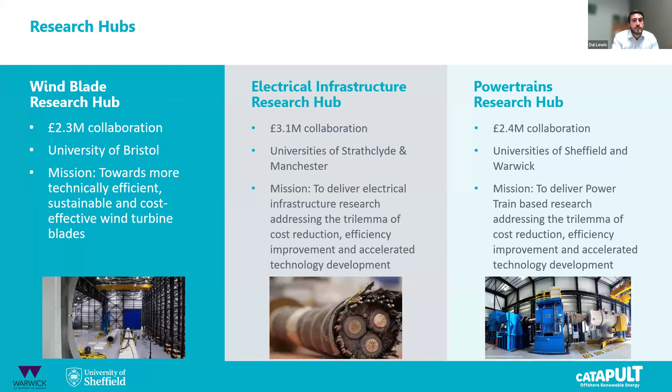There are a number of motivations for us in developing the Powertrains Research Hub, all based around improving reliability and affordability of wind turbine powertrains as they get larger and larger in order to meet our 2050 net zero targets. We've worked with a range of stakeholders and aim to disseminate the research to as broad an audience as possible throughout industry and academia.

Since its inception, we've developed a strong collaboration with the Universities of Sheffield, Warwick, Strathclyde, Northumbria, and have also undertaken a number of research projects with GE through the programme. We've undertaken a large number of co-funded PhDs and research projects and have disseminated the work at many international conferences and within a number of journals.

I will now hand over to Hyunjoo Lee, our head of turbine systems, who's going to speak to you about how the work has supported us.

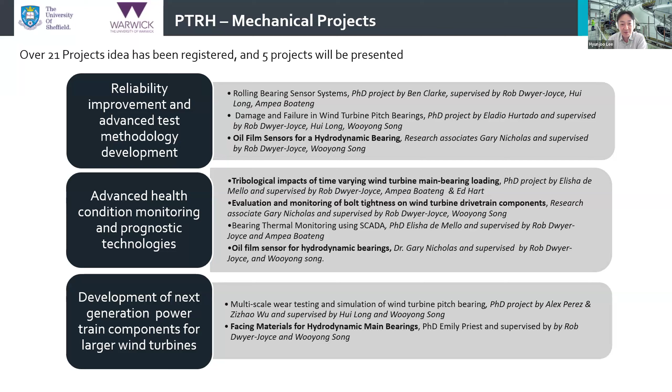Dr. Gary Nicholas investigated 2 interesting topics: the first is the evaluation and monitoring of bolt tightness on wind turbine drivetrain components, and the other is the oil film sensor for hydrodynamic bearings. PhD student Ms. Emily Priest will present her ongoing research about the facing material for hydrodynamic main bearings.

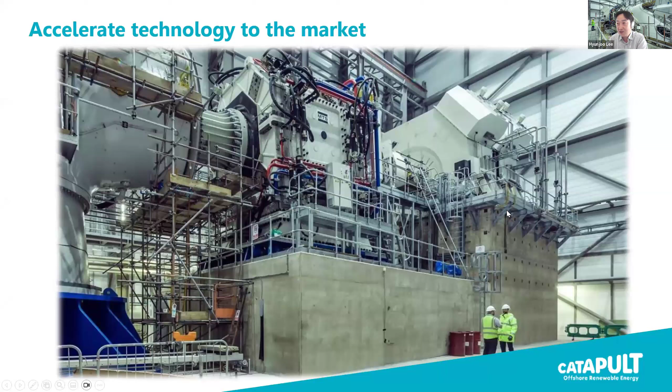Thank you once again for your attention, and let's work together to bring technology to the market faster. I'll hand it over to Professor Rob Dwyer-Joyce.

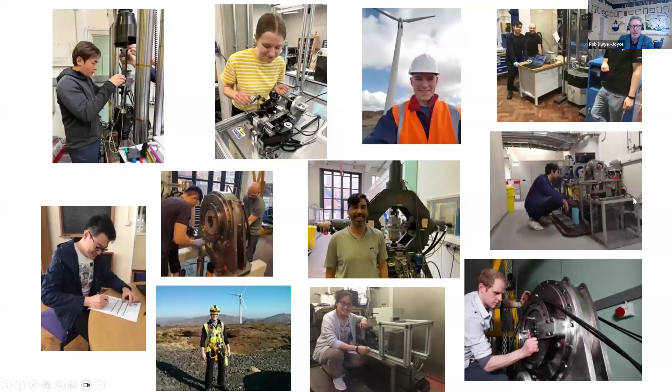The PTRH, when it boils down to it, is a group of PhD students and researchers who have had the opportunity through the PTRH, working with our partners OREC, to do some really exciting projects in the wind domain. There's some pictures of our PhD students at work. You'll hear from a couple of those today.

Actually, other PhD students around the patch at Sheffield are rather jealous of these guys, because how many PhD students get to go up a wind turbine during their projects? Two of ours have, and they're all working on really live industrial projects.

So I'm going to finish with that picture of some very happy, contented PhD students, some of whom have got their doctorates, and some of them will get them soon.

Okay, thanks. Now I'll hand over to my colleague, Professor Hui Long, and she'll give the first technical talk from the projects that have come out of the PTRH.

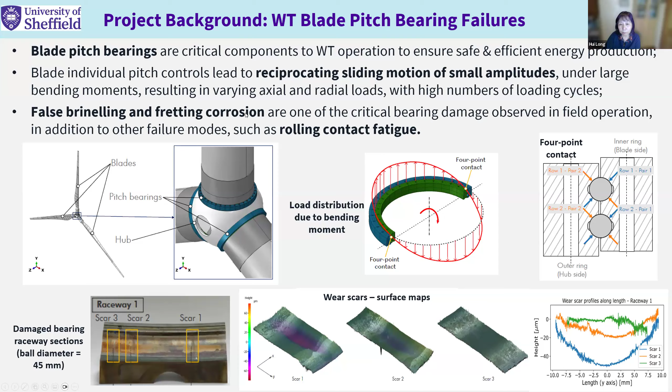In this research hub framework, we have two projects in this area: M7A and M7B. I'm going to talk to you briefly about those two projects.

The objective of this project is to develop an enhanced test strategy for large scale tests by developing a small scale laboratory scale test method, because large scale, full scale testing is very expensive. We want to understand the frictional behavior and wear damage accumulation using smaller scales before we conduct large scale testing. We also develop finite element simulation models to model wear accumulation in those tests.

Those findings will help us develop a better understanding for future tests. The work I'm presenting today has been done by researchers Eladio, Alex, and Zizhao.

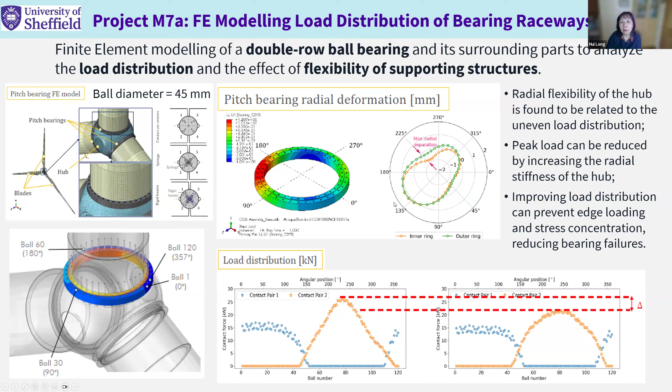With that understanding, we moved on to develop the experiments. M7B looks at those experiments. We have two small scale and medium scale experiments, developed and performed at the University of Sheffield. These will support future large scale experiments, which will be done at the Catapult in the future.

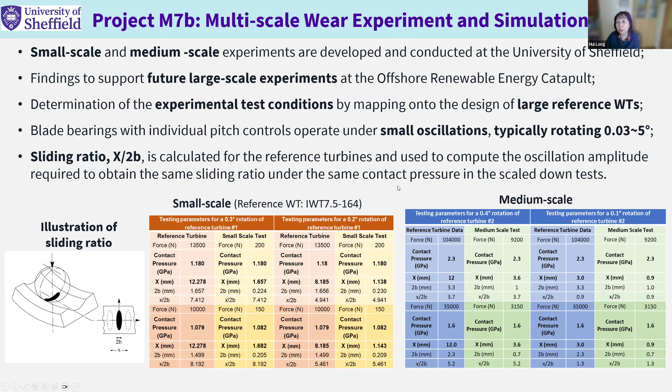The first thing we need to do is develop experiment test conditions by mapping onto the design of a large reference wind turbine. Two important parameters we need to decide are contact pressure and sliding ratio. There are some illustrations here showing what we try to map with the large ones, so we make sure what we test in the small scale and medium scale can map the similar operation conditions of the large wind turbine.

This is the small scale experiment design, testing, and finite element modeling. The tests are performed on a small test machine, the UMT3, and the specimens are cut from a commercially available wind turbine ball bearing. This way we can achieve the parameters we need, since this is the cheapest way we can manufacture specimens. This table shows all the tests conducted and some examples of measurements and comparison between FEA and measured wear depths.

The measured average frictional coefficient is quite low. We use Alicona to measure the wear depths. However, due to the limitations of this small rig, we are not able to capture the effect of higher oscillation amplitude and higher contact pressure, as contact pressure and amplitude are relatively small. However, this method is very efficient to get wear rate, which is shown here and is an essential parameter for finite element modeling.

We move on to look at the medium scale experiment design of test. This rig is a biaxial rig in our mechanical lab. Using this lab we can look at a bore diameter of 25 millimeters. We developed this test plan, and as you can see, we achieved the ability to determine average friction coefficient using the force measured by the rig.

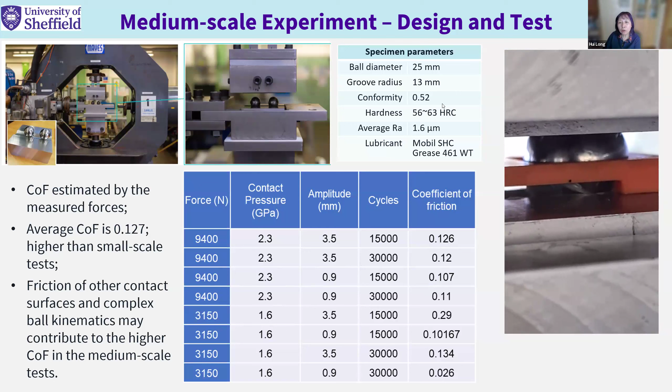The friction coefficient is higher than in the small scale test. We believe this is because this rig design involves other contact surfaces and more complex ball movement, as you can see the ball shows more complex movement, which may contribute to the higher coefficient of friction. We use a grease lubricant, commercially available, the only one we found for wind turbine applications.

Some measurements are shown here. We measured some of the specimens and then decided we can determine the wear rate from the test. This wear rate, as I mentioned, is essential for finite element modeling, and is higher than in the small test. Again, one reason is the more complex ball movement, and also because the initial surface roughness of the specimens in those medium scale tests is higher than in the small tests. These measurements show some of the characteristics we saw from measurements of the real pitch bearing sections we studied.

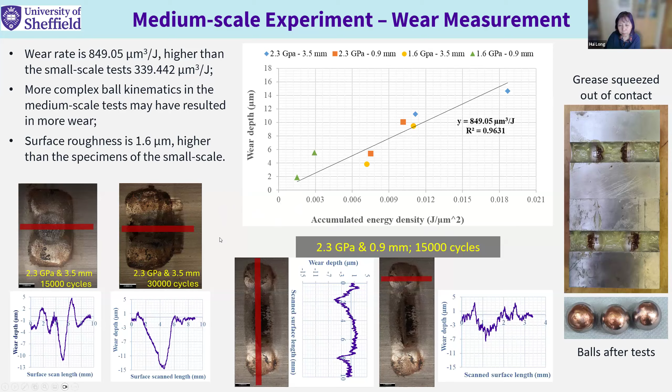Through evaluation of the effect of wear rate values, considering 100%, 20%, or 10% of the dissipated energy contributing to wear, we are able to find a close match between FEA and experimental measurement.

Another important observation is the contact stress distribution pattern and also the wear pattern. We see the wear is significant in the top and bottom regions where the contact pressure is not highest. This is because it's the Heathcote slip.

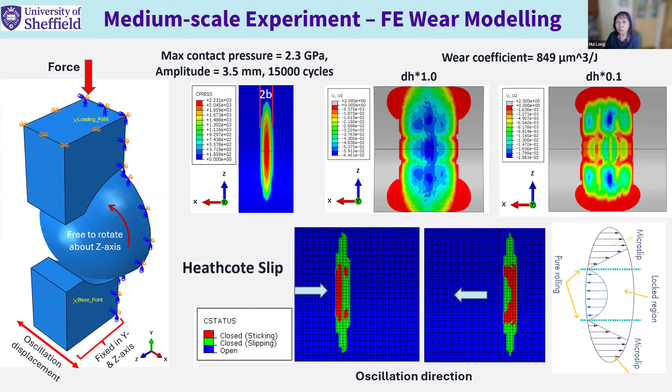This is because in those regions we have pure rolling. So FEA provides good insight into the more complex condition of both effects of contact pressure and sliding.

Currently we are working on the FEA simulation of the large scale test. This is only a very initial, preliminary result for a very small number of cycles, 2000 cycles.

Some main conclusions: the measured wear rate shows a similar linear trend, basically increasing with load cycles. And the medium scale test reveals more complex ball movement than the small scale, which couldn't produce this.

FEA modeling and the test from the medium scale show similar wear patterns, which also confirms contact pressure, oscillation amplitude, and Heathcote slip are important to wear accumulation.

We also show FEA modeling can clearly show the effect of Heathcote slip, and we can use the evaluation of dissipated energy contributions to wear. In our case, 10 to 20% enabled the accurate simulation.

We currently continue the large scale FEA simulation, and we will report our progress to you in the future. Thank you.

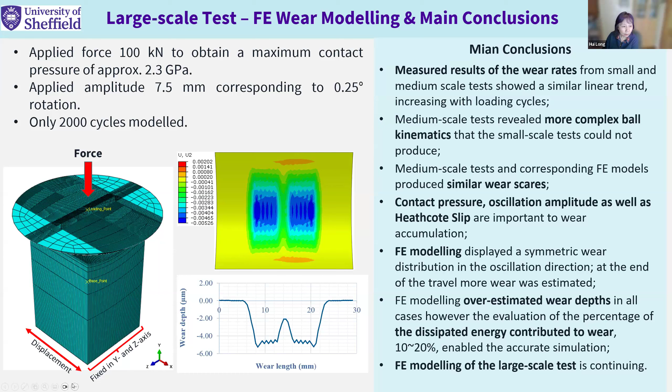And next we have Elisha. Want to share? Of course, two seconds. Is that all visible? Perfect, thank you. Okay fantastic. So yep, I'll just crack on then.

This is my bit of an overview for my project and the work I've done here with Aura for the last few years. I'm looking at the main bearing of a wind turbine. My work is mainly focused on spherical roller bearings, which are quite common main bearings in wind turbines.

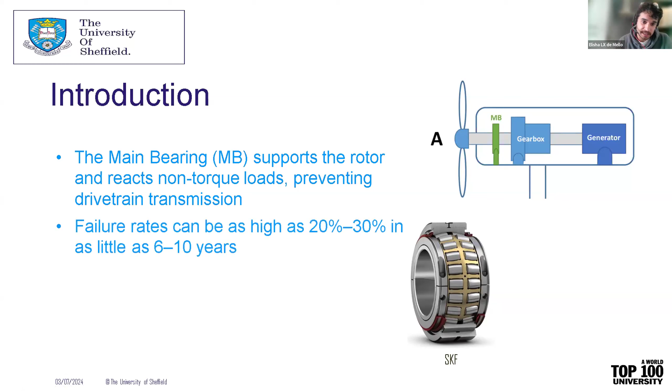The role of a main bearing is to support and react against damaging loads, preventing them from being transmitted further up the drivetrain to critical components like the gearbox and generator. Failure rates are currently very high, which is problematic as replacement of main bearings is typically very expensive, especially offshore, involving additional factors such as vessels and unplanned downtime for extended periods.

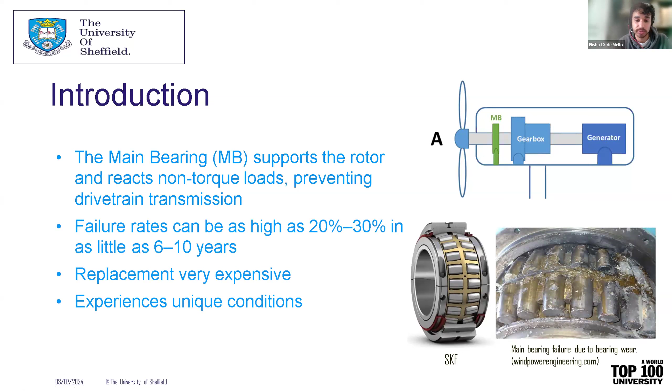To really understand why the main bearing fails so frequently, we need to understand the unique conditions the main bearing experiences. I'm just going to talk about that for a slide.

The unique conditions the main bearing experiences compared to more general bearings include very low speeds, around 20 RPM or so, and exceptionally high loads, thousands of kilonewtons. There are also multiple combined effects due to the nature of the wind and the wind turbine's adaptive control system.

These are just a few of them listed here, but when we consider these as a whole, we find that the loads exhibited on the bearing from the shaft are circularly looping, one to two second duration loads that fluctuate and move around the circumference of the shaft. This is a polar plot here.

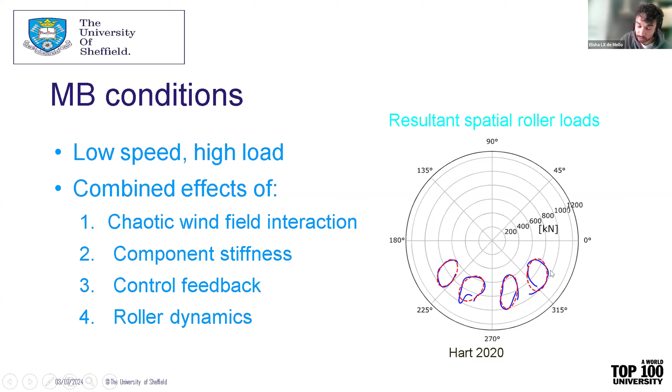Here is an angle, and we're getting these loads that are looping around circumferential locations of the bearing. So they're very complex loading patterns we're seeing.

My project was really to investigate the effect of these loading patterns on the main bearing. So I'm located here, if we're looking along the drivetrain of a wind turbine, and my project is basically split into a theoretical component and an experimental component.

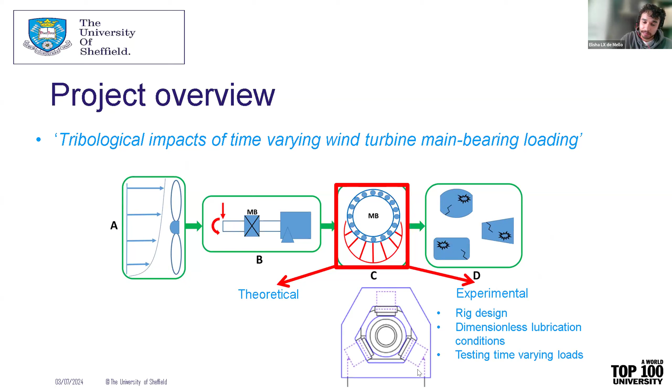Experimentally, the plan is I'm designing and implementing a rig where we can use actuators to load these to create a vector of a load that can span and move around the circumference of the bearing and give you the same looping loads we've just seen.

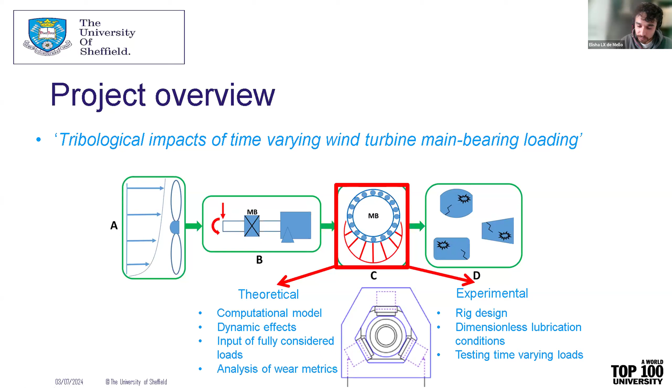Theoretically, I'm using computational techniques to investigate the specific dynamics of the rollers, these individual rollers, as they move around the bearing, and how to input those time-varying loads I just showed you on the previous page.

So just one of the initial bits of work I did was this macro slip model, which took the first year or so.

The idea was this was a Newtonian model, so it considered the forces that each roller experienced, such as reaction forces due to contact, gravity, centrifugal forces, cage reaction forces, and the like. It uses these forces to integrate the velocities of the rollers and treat them as rigid bodies.

The idea is that a contact patch is formed due to deformation of material. When the raceway and the rollers move, if the forces are great enough and friction is not sufficient to drive the system, you get relative differences in the velocities of the raceways and the rollers, creating slip. This slip is believed to be damaging, and we use frictional energy as a damage metric, an integral of slip and the reactive force in parallel to that direction.

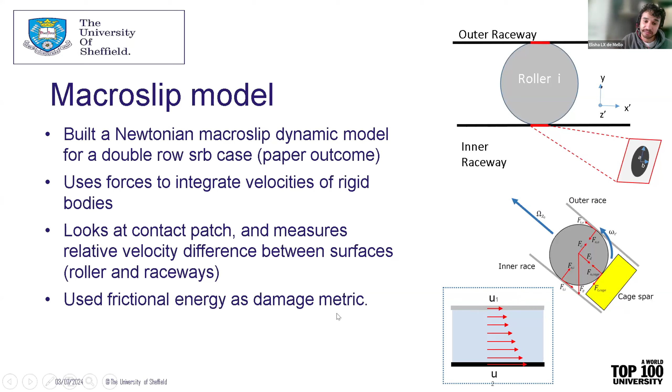So this model directly investigated slip, and we found, looking at these normalized results, that we got higher frictional energies at actually lower wind speeds. This corresponded to the operational thrust strategy of the turbine, as it started to pitch its blades after that, giving a higher radial force and less thrust force. That was an initial result of the study.

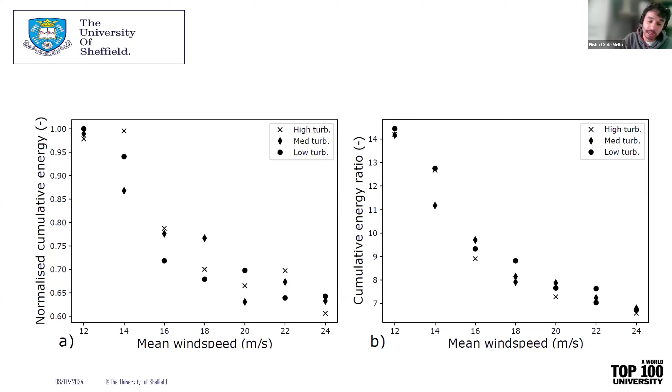That was a macro slip model, which basically assumes that the entire contact patch slips at the same speed. However, this isn't entirely accurate, and there are multiple things really going on when you look at a roller bearing. So here's a cross section of a roller bearing.

It's moving, rotating, and orbiting, so it's moving towards us, and we're looking at it dissected across the page. But due to the contact angle of these spherical roller bearings, they're tilted backwards. There are effectively different radii due to curvature and this tilt.

This means that when this roller rotates, different points along the surface are going to be moving at different speeds. So there's quite a complex interplay of things going on, and there are also effects due to strain, elastic deformation of material due to high loads, and this needs to be fully considered to properly understand what's going on.

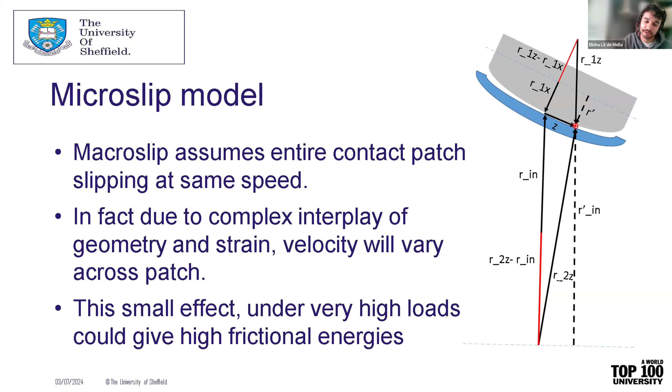And because of this, even very small differences in speed across this contact surface—if we get a very small slip, because the system is so highly loaded, we could get potentially very high frictional energies. So that's what my model went on to investigate.

So we're now moving into a microslip regime, and what I did is use Carter's strip theory to solve the microslip equation. Sorry to throw an equation in here, but basically this looks at a point on the contact patch, and it says that the slip speed is just a function of a term due to geometry.

This is a spin speed term, which we're neglecting as we're not assuming spin in the system, and these are strain terms. Quite simply, Carter's strip theory splits the contact patch up into lots of little strips, then establishes boundary conditions for each strip, and says that it's a steady state system. The system is solved for equilibrium, and it solves the strain so that equilibrium is maintained over the entire contact patch.

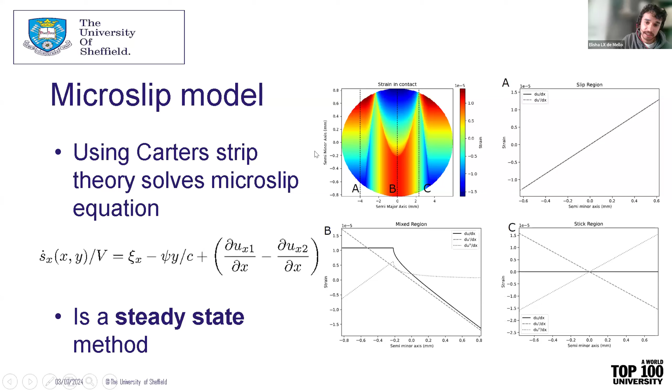So I implemented this method, and I found that it gives you this—a classical observation that we get over a contact patch. We get regions where there's no slip, and regions where there's constant slip and high slip, due to that interplay of geometry and strain that I talked about.

I then applied this preliminarily on a test case spherical roller bearing, the same one I used in the previous macro slip model, to look at frictional energies. We can see that due to that contact angle I talked about, because the rollers are at that angle, we get differences in where frictional energy is concentrated.

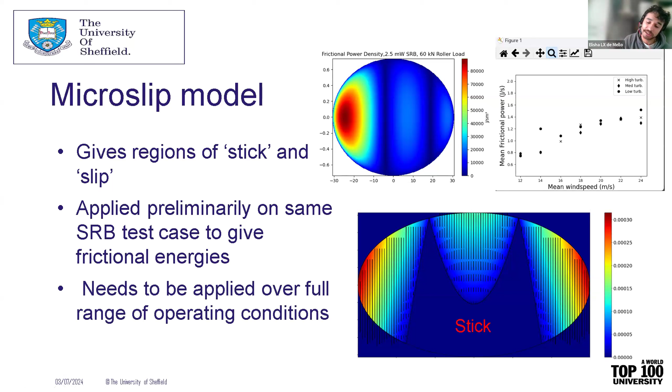To fully conclude the study, it needs to be applied over a full range of operating conditions, which I'm yet to do. So the next thing I then went on to, as I mentioned, is that the microslip model is a steady state model.

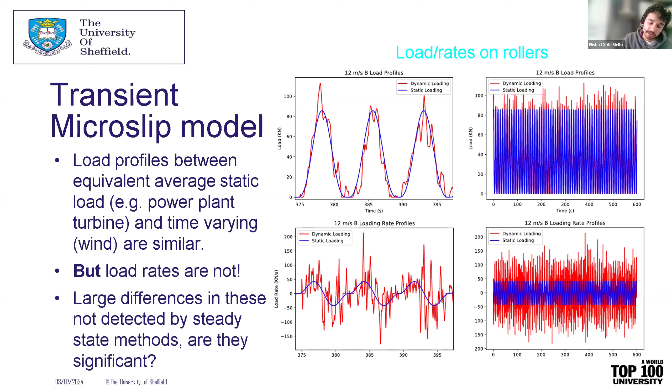The large differences in these will not be detected by a steady state model, so we need to determine if that's significant, and that was the next work I was conducting.

This is a table showing how roller loads and loading rates vary over different wind conditions, and we can see that the loading rates get much higher, sometimes an order of magnitude or so higher. This could be due to effects such as load reversal events, where a gust of wind lifts the shaft up and drops it, giving sudden large peak accelerations. This is a graph of that, on a logarithmic scale.

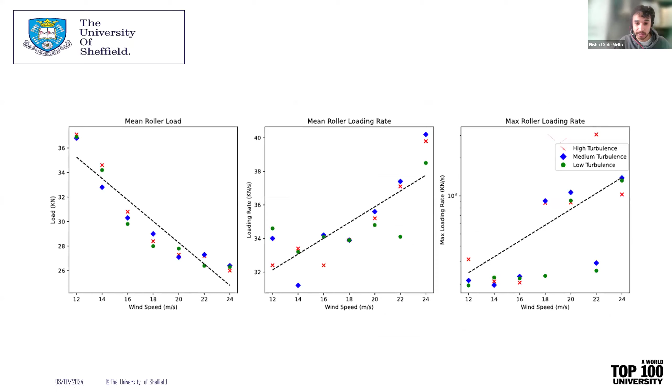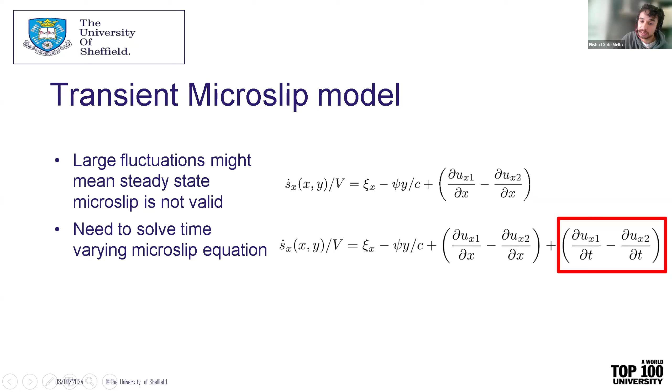So we're seeing much higher loading rates when the wind speed increases, and we're getting more chaotic conditions. To investigate that, we extend the steady state microslip conditions to include this time varying term, which is something I've been investigating, but I'm going to skip over.

The final bit of work I've got to do over the last month or two—I've been away on industrial placement whilst my rig is still being implemented. The remaining steps are implementing the hydraulic control and a few remaining instrumentation issues with the ultrasound. The idea of this is that it should support my theoretical component of my work.

So these are the remaining tasks of my project, and then I'm finished: test the steady state microslip model over the full range of operating conditions, just like I did for the macroslip one; finish the transient microslip model where it considers the load rates rather than steady state; then test it over the full range of operating conditions and compare results from all three models and the strengths and weaknesses of each.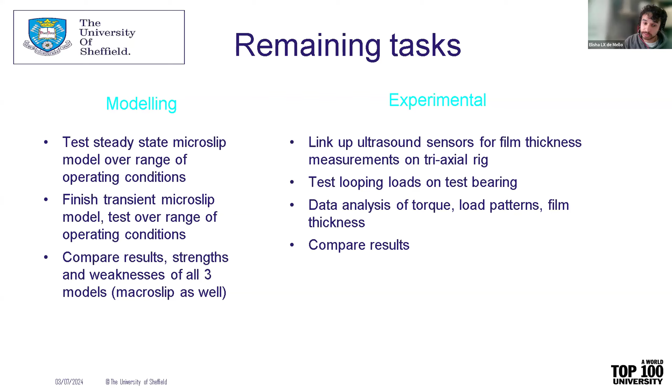Experimentally, I've got to link up the ultrasound sensors for film thickness measurements on that triaxial rig. I then have to test those looping loads I've talked about on the test bearing, and analyze torque and film thickness against the loading patterns and compare the results. That is all. I hope I've not run over. Thank you.

You didn't run over, Elisha. That was perfect timing. Grand. So, Di, you could go back onto the slide pack.

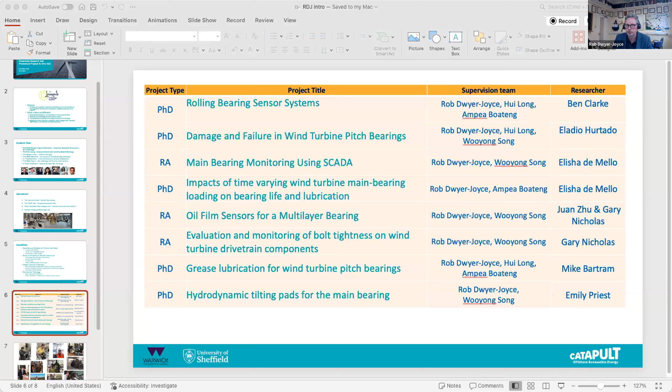Have I got the right one now? There we go, yeah perfect. Thanks, that's it, full screen.

This is all about bolt tightness and whether we can detect it using accelerometers.

The motivation is that bolted connections are widely used in wind turbine drivetrains and are prone to self-loosening, which is obviously a safety hazard with potential for misalignment. There's a high number of bolted connections, as you'd imagine, in a wind turbine, and manual inspection is very time-consuming.

So this is all about passive sensing using accelerometers, which could potentially allow for quicker detection of bolt loosening. The aim of the project was to develop a method of detecting wind turbine drivetrain bolt loosening using vibration data.

There are four objectives: building a test protocol on rigs in the lab, identifying the best sorts of sensors and configurations and carrying out some testing, and then building signal processing algorithms which we can use to analyze and process the data from experiments.

The fourth objective, which isn't finished, is about using those algorithms on Levenmouth data from the Levenmouth turbine, provided by OREC, which is really more of an aspirational objective rather than a delivered one.

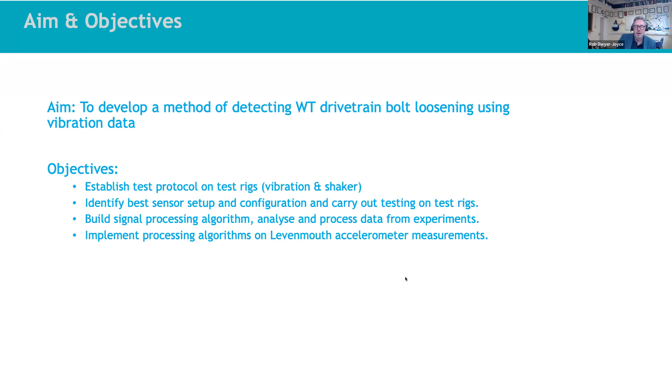So the methodology - there are two methodologies that Gary looked at. The first one is essentially measuring the resonant frequency of the structure. As bolts loosen, it changes the stiffness, and the stiffness reduction then reduces the resonant frequency. So we measured the resonant frequency, looking at Fourier transform data of accelerometer measurements to identify the resonant frequencies and pull out how these changed.

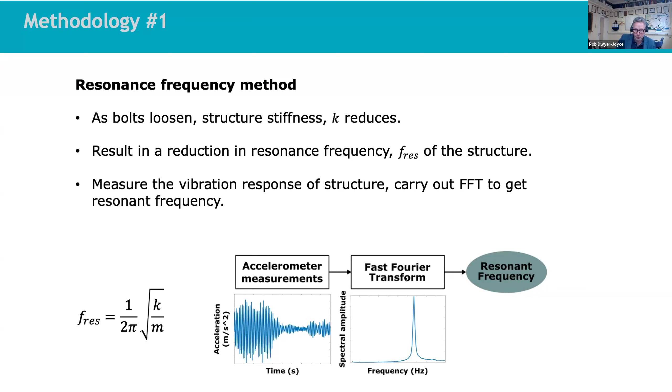Now, I'm not going to talk about this because it didn't really work. We found that it was very hard to detect which bolt was loosened. You could detect changes in the stiffness structure and the resonant frequency, but it was very hard to determine which specific bolt was loosened. So I won't be presenting any data from that - you could certainly detect when a bolt was loosened, but not which one.

So the method that I'll show today is a linear regression method, and what Gary did is create this thing called a characteristic damage parameter.

Essentially, the way the model works is you look at the accelerometer data during a period when the bolt is tight, and you build a regression model to predict what that accelerometer data would look like going forward into the future. Then you compare that with what you actually get from your measurements, and you produce a residual - a difference between the two.

So the next slide. Oh, I'm doing this - I'm sorry, I'm controlling it now. Next slide, Rob.

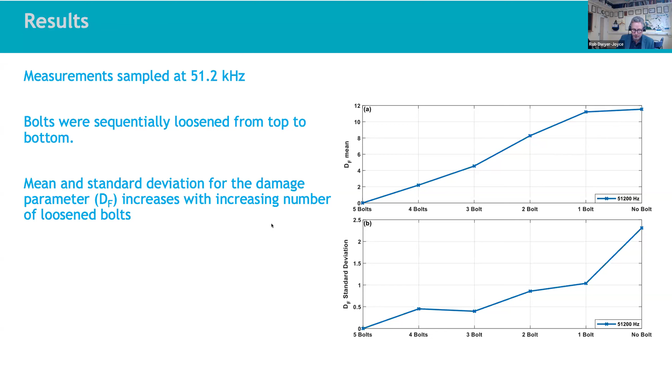The other sequence was to remove the inner left and right bolts, which were loosened, followed by the outer left and right, and subsequently the center bolt's torque was reduced. So there are three separate cases there, and we could look at how this damage parameter was changed by the loosening - we could predict that as well. These are measurements at 50 kilohertz.

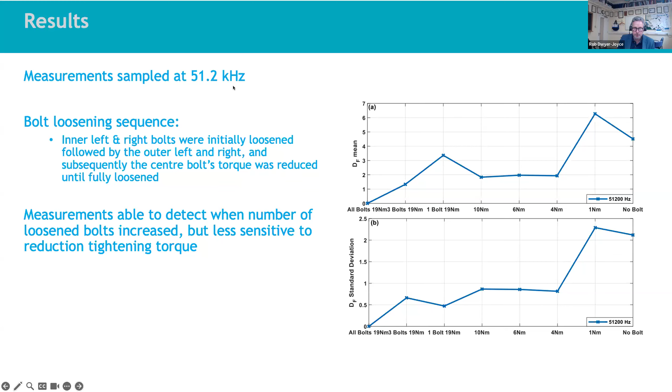Sampling at a lower frequency, 2 kilohertz, it's still possible to detect the damage parameter DF. It's still sensitive to the number of loosened bolts, but less sensitive to the variation in bolt torque. So maybe dropping the bolt torque down didn't significantly change the vibrational properties of this, so you could pick it up at these lower frequencies.

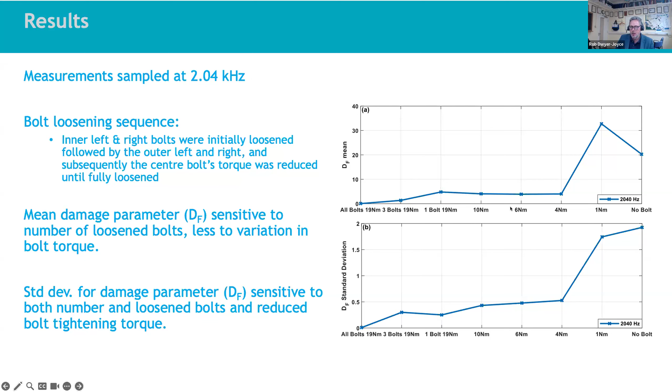Generally, the resonant frequency of this structure is in about this region, in the kilohertz region. So these sensors should be fast enough to be able to predict, to be able to sample that. But in this instance, it didn't quite get the reduction in torque on the bolts here, although it could predict when the bolt was fully loosened.

So in conclusion, Gary tried resonant frequency methods and regression methods to detect the loosening of the bolt joints. The regression methods were able to function well regardless of the sampling frequency of the accelerometer, so we were able to do it at 50 kilohertz and 2 kilohertz. The resonant frequency methods could detect loosening of bolts, but not which bolt was loose.

A sampling frequency of 2 kilohertz was also sufficient to allow detection of bolt joint loosening. The minimum sampling frequencies are dependent on the resonant frequency of the structure, and typically, as I said, around about 0.3 to 2 kilohertz for wind turbines. The most successful algorithm was the auto regression method, and these can be used to provide an indication of bolt tightness, with the latter method requiring higher computational power.

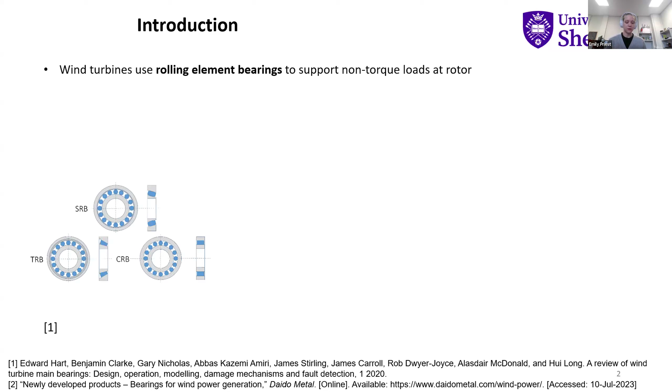So just an introduction, as you saw in Elijah's presentation, wind turbines usually use these rolling element bearings to support the non-torque loads experienced at the rotor, but research and industry is now going towards using these tilt pad journal bearings instead for the main bearing. But they're usually used in high-speed applications, and the behavior in low-speed applications isn't really widely studied so much, so that's what we're doing here.

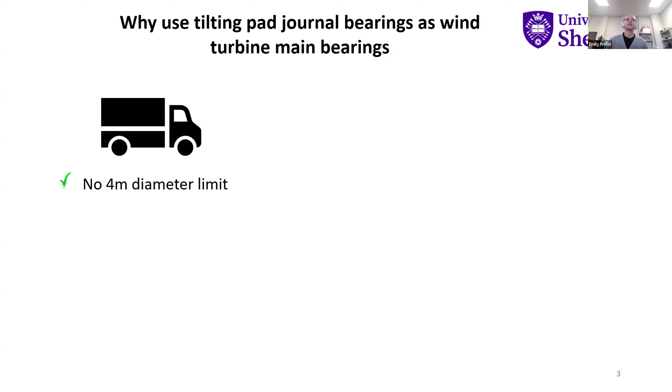So why are we going to be using these tilting pad journal bearings in a wind turbine? The issue with wind turbines is they're getting bigger, they're getting more powerful, so the main bearing size is getting bigger. So you then have a diameter limit when you transport them by road, and you can't split apart these rolling element bearings like you can with these tilting pad journal bearings. So that's a major advantage. You can also replace the pads in situ, and you can use smaller vessels to transport the individual parts, and all of this goes to reduce the downtime.

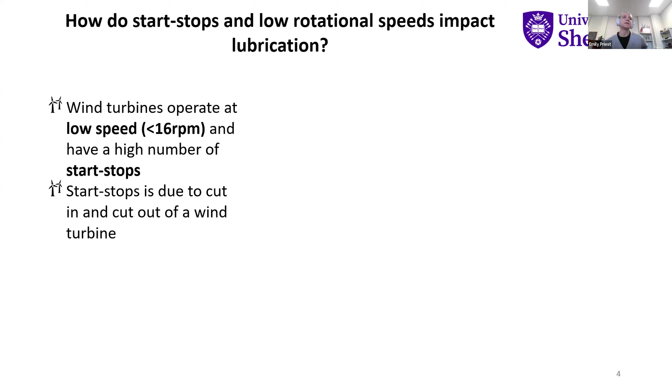So wind turbines operate at low speeds, as I said before, and they have a high number of start-stops. We have these start-stops due to the cut-in and cut-out of the wind turbine. So as we decrease the speed during start-stop and general operation idling, we go from hydrodynamic lubrication through to mixed and boundary lubrication. And so we're going to get asperity contact, and we're going to get wear and potential catastrophic failure due to this.

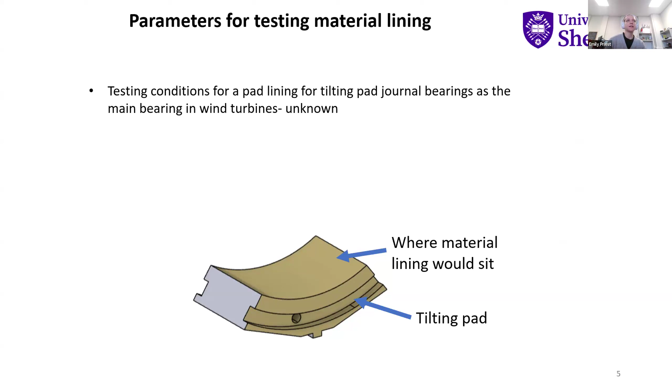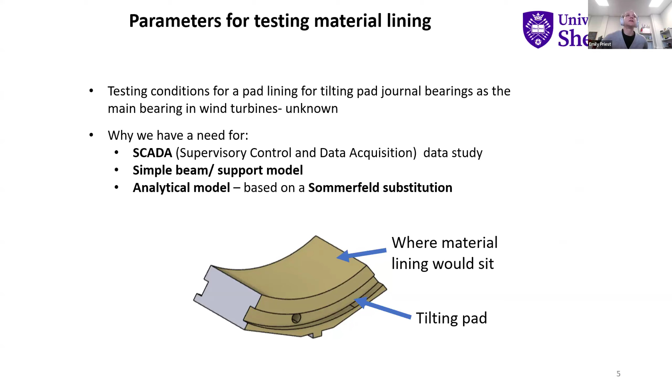But the issue with conducting tribological testing on this material layer is that we don't know the testing conditions, like the loading or lubrication conditions. So I have a need to study SCADA data, data collected from wind turbines, to understand start-stops. I also need to do two models: a simple beam support model and an analytical model to model the pressures. First, let me go through quantifying start-stops.

I studied 1 year of SCADA data from a 3 megawatt wind turbine and got results from the algorithms showing shutdown events over the year. I correlated the shutdown events to wind speed, and found approximately 300 shutdown events over the year, related to wind speed, suggesting they're independent of wind turbine size. I also recorded the length of the shutdowns, about 16 minutes, but since our data is only taken every 10 minutes, we have to take that with a pinch of salt.

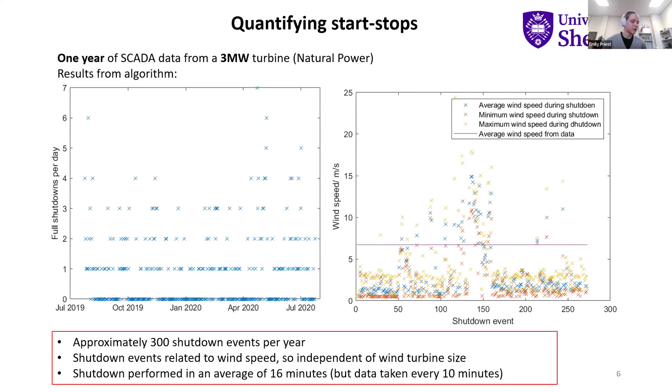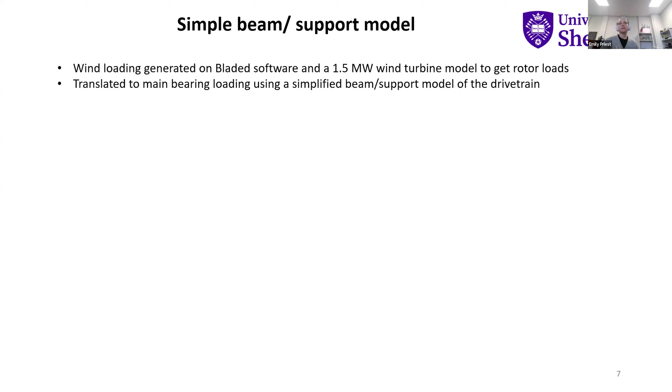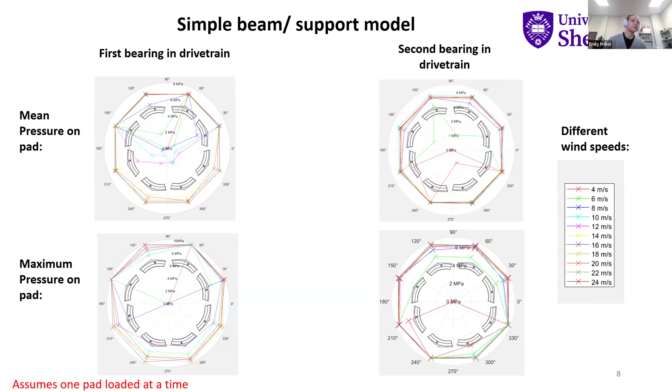So we got some results. I found the mean pressure on the pads for different wind loadings. For the first bearing on the drivetrain, it's about 7 megapascals at maximum, increasing with wind speed, with a maximum found of about 10 megapascals. The second drivetrain bearing has much lower load, as you'd expect - just about 4 megapascals as a mean value and 6 megapascals as a maximum value. Just to make you aware, this assumes that one pad is loaded at a time.

We also found the frequency of the pad loading. We found that 2 pads were definitely more loaded than the others, and in the future we're going to update this with a spring model.

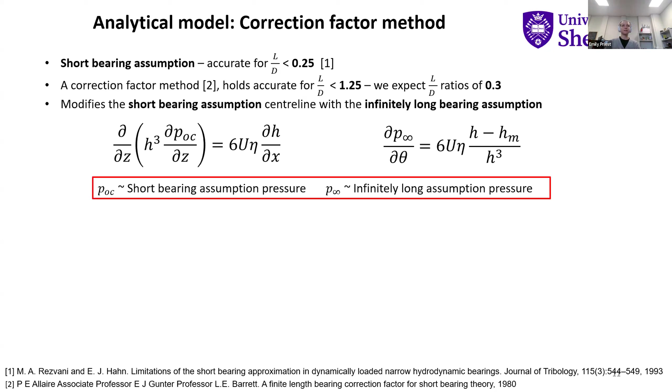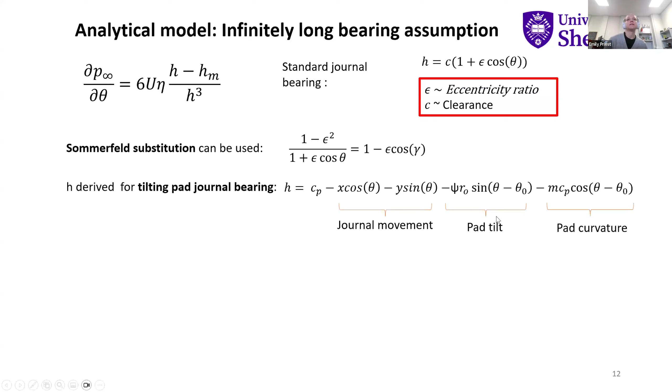So we went ahead and found the infinitely long bearing assumption, using a Sommerfeld substitution, which is used for a standard case, as you can see here, where the film thickness is just there. But the issue we have with using the substitution with the film thickness for a tilting pad journal bearing is that we have to consider all these different factors involved in the film thickness: journal movement, pad tilt, and pad curvature.

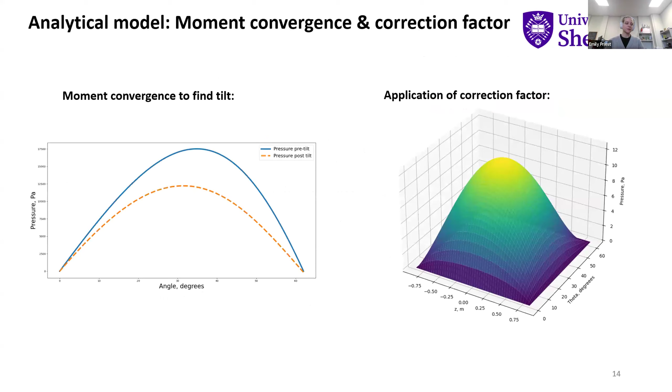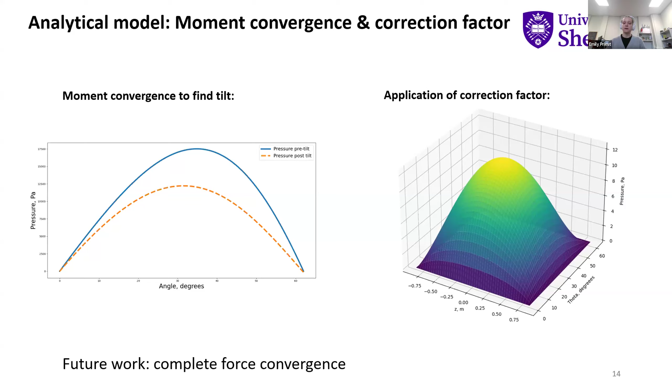So the future work is to complete the force convergence of this model, and then we should have a much better idea of what the pressure is doing on the pad, or what the pressure field is doing.

So moving on to the testing. What kind of materials do we need? We need to withstand high amounts of boundary and mixed lubrication during the loaded start-stops, and moderate loads. We need a low coefficient of friction due to starting the wind turbine, and it needs to be temperature resistant because the oil supply is going to be shared with the gearbox, so it's going to be high temperature.

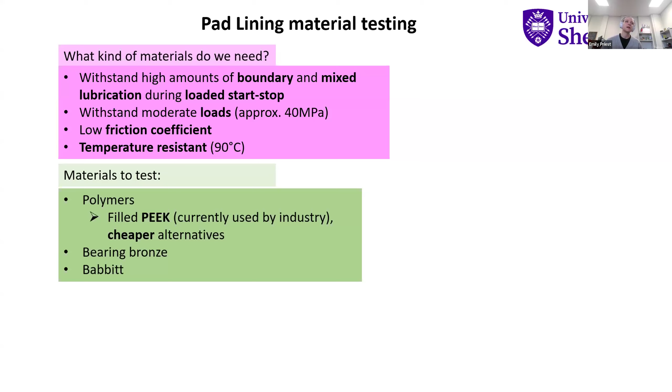Looking at the types of materials we're going to test, we've bought polymers as an obvious choice. Filled PEEK is currently used by industry, but we think it might be an over-engineered design and it's also really expensive, so we're looking at a few cheaper alternatives. We're also testing bearing bronze and babbitt.

So how are we testing? We're using the modelled loads and the predicted start-stops, and using those values to build a test matrix to then use on a conformal block on pin setup, as you can see there - conformal block representing the pad.

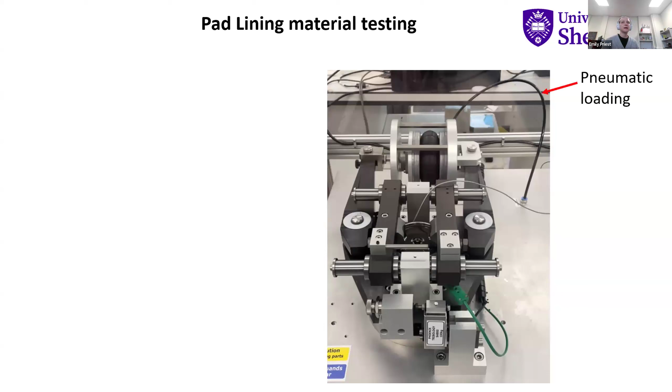And the steel pin representing the shaft. So this is the TE67, and that's what we're using to test. It's pneumatically loaded from the back, loads transferred to the front using the loading arms. You can see there, that's our test specimen with the conformal block and our rotating steel pin.

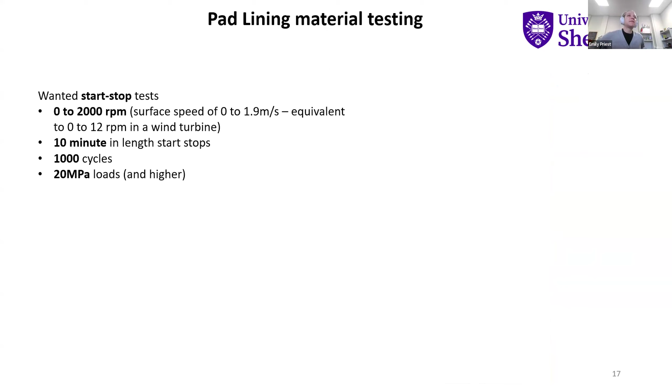So the testing we've completed so far - based off studies we wanted to do some 0 to 2000 RPM start stops with 10-minute length start stops, 1000 cycles and 20 megapascal loads, but probably go higher too. So far we've just conducted some 3x 10-minute start stops on PEEK, and we haven't seen any wear. We've gone from 0 to 800 RPM and 20 megapascals.

The reason why we haven't done what we quite wanted to yet was because we are limited due to our temperature control - we can't keep temperatures low enough and accurate enough to 72 degrees to do longer tests, but now we should have that under control. So doing tests is pretty imminent on some more materials and these same materials too.

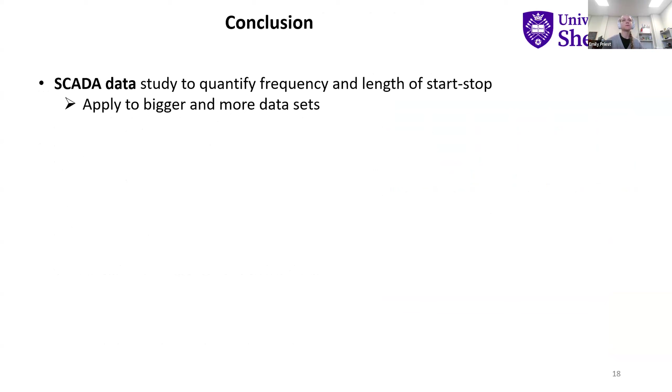To conclude - we did a SCADA data study to quantify the frequency and length of start stops, but we want to apply that to bigger and more data sets to verify the results we've got. We've done a simple beam support model, but we need to share the load better between pads, and we also need to consider the elasticity of the materials.

We conducted a Sommerfeld substitution for an infinitely long bearing and successfully implemented that for a tilting pad journal bearing. We applied the correction factor using that Sommerfeld substitution to find the pressure approximation, and we've partially implemented that and got a pressure profile.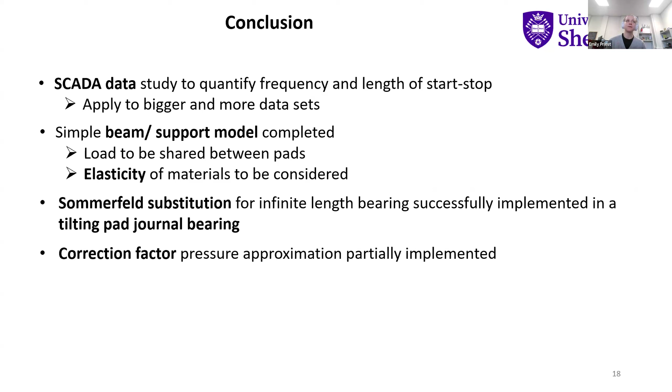And we've also conducted some initial start-stop tests, and found that PEEK is more wear resistant under predicted conditions compared to bronze, but we want to optimize the test time using SCADA data. We want to optimize the test load by completion of the models, and we want to test on more materials.

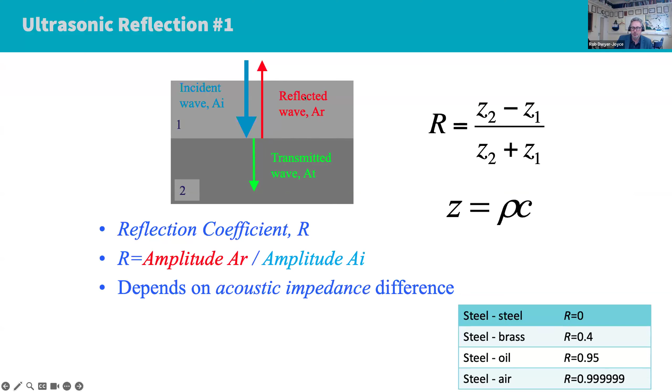For example, if you have steel against steel, perfectly bonded, all the sound wave would pass through. If you've got steel against air, all the sound wave would be reflected back. And of course, what we've got is steel against an oil film, so we've got a reflection at this oil film. What you'd get is one reflection at the front of the oil film and one reflection at the back of the oil film.

If the oil film was really thick, you could detect those two reflections in space, and from the speed of sound in oil you could work out the thickness of the oil film. But of course those oil films are really thin, so what you get actually is just one reflection from this interface.

So what we do is we don't separate it out in space, we separate it out in the frequency domain. This picture on the right-hand side is a reflection when there's no oil film present, just air, and everything reflects back, giving a signal that looks like this. You'd see an excitation pulse reflected from the sensor interface, a first reflection from the air interface, and then a second bounce as the wave came back and bounced again - first, second, third, and so on.

If you then put an oil film in the way, you get this red signal. Some of that ultrasound has passed through the oil film into the second bit of metal, so you get a slightly lower signal. This first reflection - blue, when it was against air, we call that a reference. Red, when it's against an oil film, we call that the measurement signal.

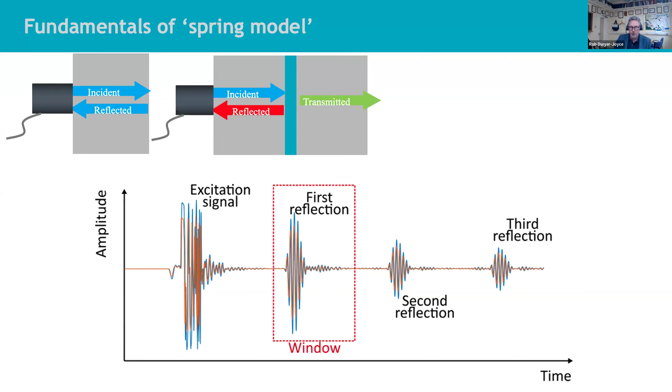So we take that signal, the first bounce, and we Fourier transform it. We zoom in on it, and you can see it's slightly smaller because some of the sound wave has passed through the oil film - the thinner the oil film, the more sound will pass through. If it's a thin oil film, this red line will be lower. We Fourier transform that, there we go.

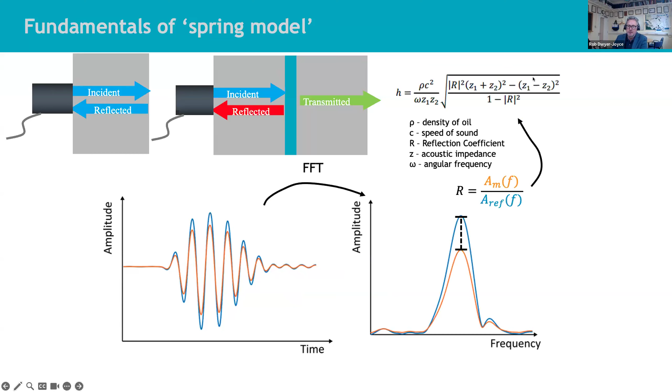Then we measure the reflection coefficient, which is the amplitude of the red one divided by the amplitude of the blue one, and we put that into this equation. You can read all about this in the papers I've been writing over many years. But we can measure that reflection coefficient, the proportion of the sound wave reflected, and do some fairly simple analysis to get the oil film thickness out of that.

The kind of equipment you need is these piezoelectric transducers, something like this. We usually build our own from piezoelectric material, bond it on the bearing back face, send the signal through and receive it by the same piezo. The voltage is converted into a mechanical wave that travels through the material, bounces back, and is converted back into a voltage again - that's what this pulser does. It generates short duration voltage signals, and a digitizer receives them and converts them back into a digital signal, which we process with LabVIEW.

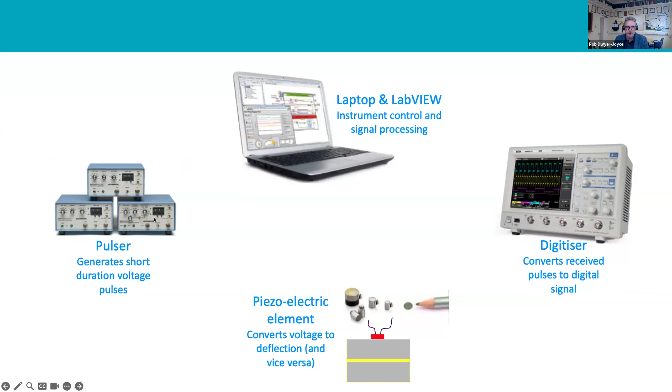This is the basics of the measurement setup: a pulser, a receiver, a digitizer, and a laptop to process it all. There are various different ways of doing this - we've got different sets of equipment, some more sophisticated than others, some very simple. But that's, in its essence, what it does.

So that's all well and good, that's a nice simple application. The problem is these pads, as Emily pointed out, are likely to have a facing material, a polymer, to withstand wear. If it was metal facing like white metal, it wouldn't be a problem.

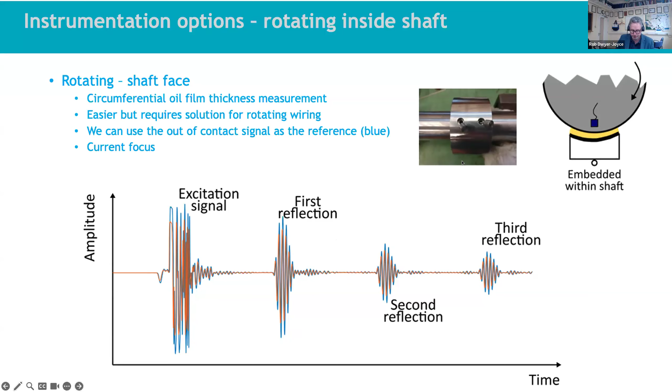So some benchtop investigations to see how this is going to work with the typical bearing materials that we're going to see, as Emily mentioned, PEEK. So we've done some benchtop investigations, putting shims.

It's really quite hard to generate an oil film in the lab. How do you generate a 5 micron, 10 micron oil film in the lab to test it? It's quite tricky, and the way we do it, which is not perfect, is we use these very thin shims of metal, which we squash between two blocks of flat material.

We put a drop of oil in there, squash it down, generally put a weight on top. Here it's put in a press with a load cell to squeeze it down nice and tight. And we hope that our oil film thickness is about 5 microns if we use 5 micron shims, or 10 microns if we use 10 micron shims, etc.

One of the purposes of this experiment was to try out different frequencies to use. The higher the frequency, the thinner the oil films you can measure. And what do we need for these actually relatively thick oil films?

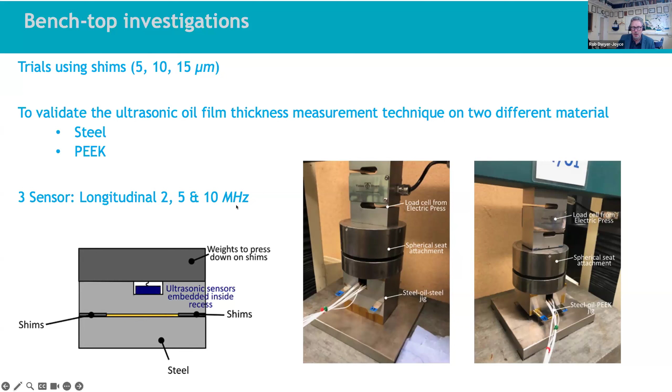So we started out with steel, oil, steel against steel with an oil film in the middle. These oil films are actually relatively thick in tribological terms, so you want fairly low frequency, and at low frequencies these are our measured reflection coefficient against our theoretical reflection coefficient. When you get to higher frequencies, more of it gets reflected back because it's not quite so sensitive, so it becomes harder to take the measurements.

And if you convert that to film thickness using that equation I showed you on the third or fourth slide, you get very good agreement for these low frequency transducers. So that's easy, that's quite successful.

If we use the right frequency, 2 megahertz, we've got a good stable signal and can get good measurements of oil film thickness. When the shim was 5, we measured between 5 and 6. When the shim was 10, we measured quite accurately 10. When the shim was 15, we measured quite accurately 15. We reckoned it was accurate to plus or minus about half a micron for 2 megahertz.

It gets less accurate when you use the higher frequencies, because the higher frequencies are more sensitive to the thinner films.

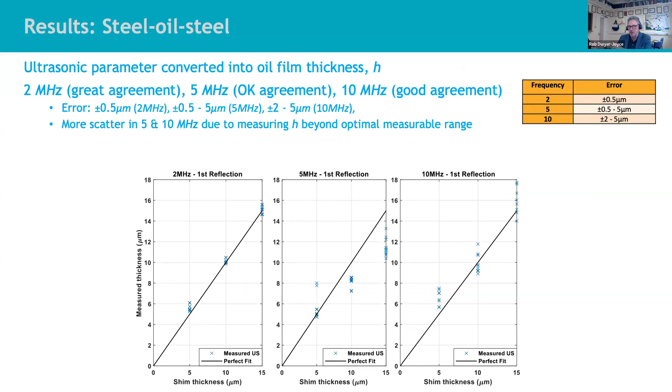Now it's steel oil PEEK. So now what we're doing is not steel oil steel, but the more realistic case of steel oil PEEK. Does it behave as well? Well, it's not quite as easy now, because PEEK has a different acoustic impedance, that term Z, than steel, so it becomes a little bit tricky to measure, but you can still do it. We get good agreement across.

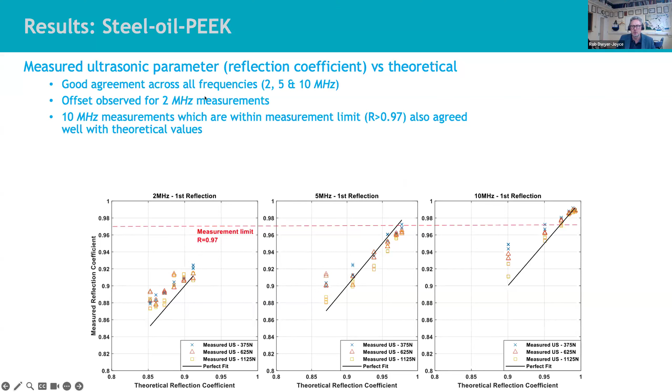Here's our reflection coefficient measurements for a 2 megahertz, a 5 megahertz, and a 10 megahertz sensor. But we tend to get an offset in the 2 megahertz region, so I'll show you something in a minute, possibly why that's the case.

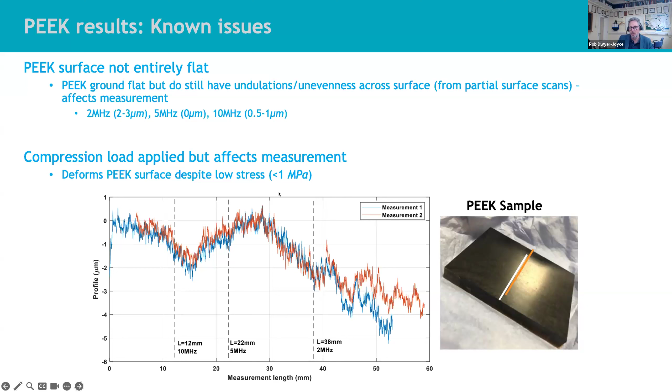Compressing it also deforms it as well. So even though this is quite low pressure when we're compressing it in the test rig, it deforms the surface, so there's an uncertainty about what the oil film thickness actually is in reality.

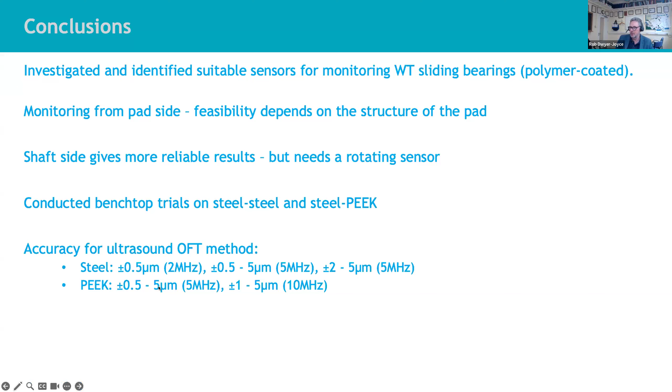And we've conducted benchtop trials on steel and steel PEEK. The accuracy for those methods, for steel, is very high. For steel PEEK, it depends a bit on the frequency of the transducers. And I think that's me.